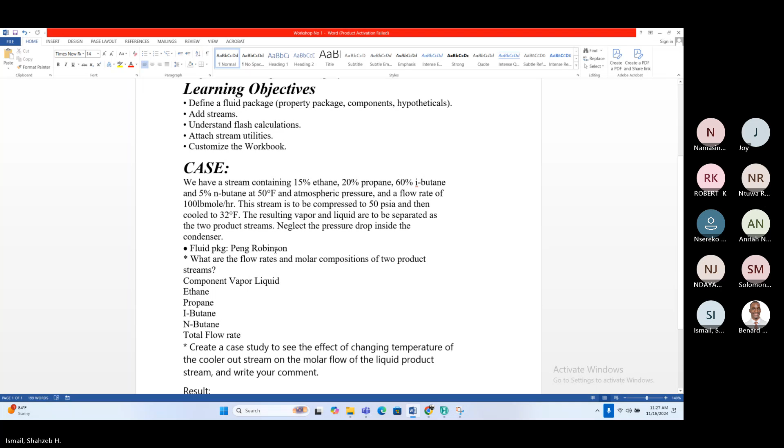We have one stream containing 15% of ethane. Ethane is a hydrocarbon. Second chain, 20% of propane, 60% of isobutane, and at a specified temperature and pressure. So the flow rate we set for the stream is 100 pound mole per hour, and this stream is required to be compressed. So we will add a compressor.

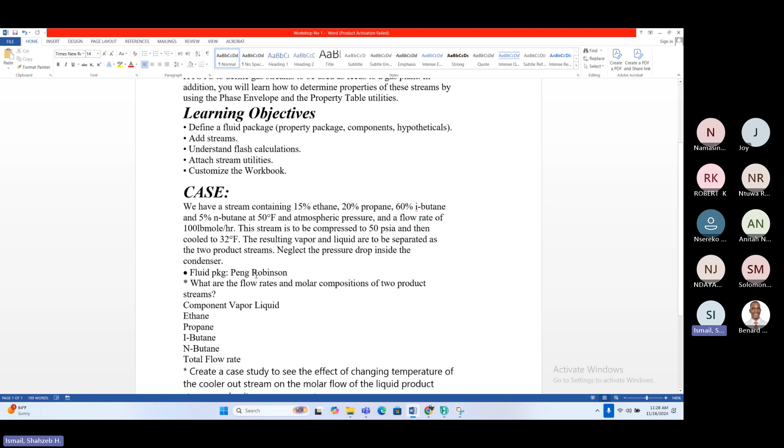First we will add a stream, and then we will add a compressor, and then we will add a cooler to reduce the temperature, because during the compression the temperature of the stream will be increased. The resulting vapor and liquid we will separate through a separator, and from the top of the separator we will get the vapor, and from the bottom we will have a liquid. And these are the conditions which we need to comply with in the software. So we will go through this with the help of the software.

So I put the worksheet and the software on one screen. So it is now visible to all of you, both, or should I change it to a single window? To me, it is visible. Maybe some other members here can propose. Are you guys okay with one? Okay.

Okay, this is the initial window of the software. When you open this icon called Aspen HYSYS, this kind of window will open. So here you can see in the resources, they have embedded some features like what's new, examples, training module. But some of these modules in the offline mode are inactive. They will only be working when you connect with the AspenTech team. Otherwise, you can work on it.

Like for examples, you click it and you have different examples, which were developed by the AspenTech team itself for reference purposes. So you can open it, and if you have a similar kind of a problem, you can click on it, and you can put your own data into the simulation and get the results. And what's new? Any feature you want to explore, you can.

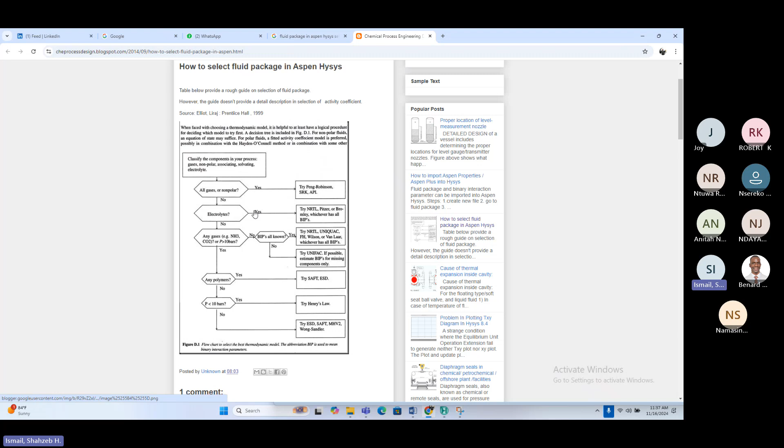But I have downloaded one guideline for the selection of the packages. So here, this is the tree of selecting the fluid packages. If you see here, all gases are non-polar. You can try Peng-Robinson, SRK, API. It will work. Maybe some of the results from different packages are different, but more or less the estimated ones are the same. If you have electrolytes, then you can try NRTL, Pitzer, Bromley,

and binary interaction parameters. If you have gases with a pressure greater than 10 bar, or ammonia, CO2, you can use this. So for starting to learn the software, you need to have this pocket dictionary with you to understand what your components are and what fluid package will comply with your simulation to get the correct results. So considering the pressure less than 10 bar, you can select Henry's Law. All these fluid packages are available in the software. You just need to click on it, and it will be selected and show you the status okay.

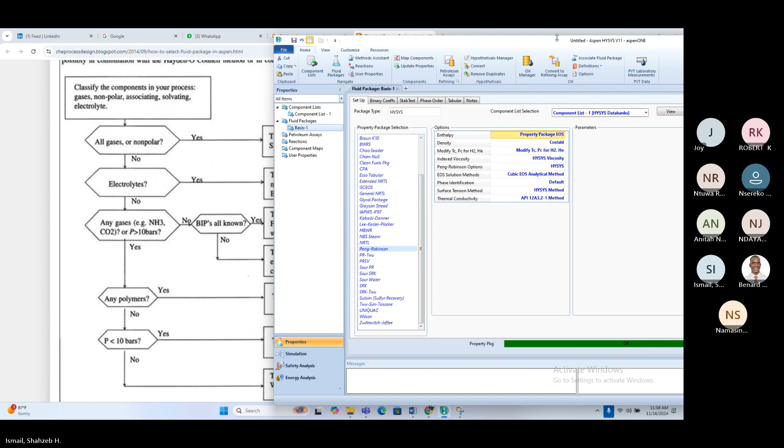So these are the two major steps in the beginning of the simulation. These steps are the important ones, because if you don't select the correct components and fluid packages, then all the simulations you do later on will not give you the correct results you are expecting. So these initial steps are the key to a successful process simulation model. The first one is the component list. You will add the components which are engaged in your process, either hydrocarbon or non-hydrocarbon.

So now here we are in the properties phase. You see the simulation. So in order to go to the simulation phase, you need to click here, simulation, because this is Aspen HYSYS. If you see other software like UniSim Design and Aspen Plus, they have a different mode of operation to go into the simulation environment. So if I click on simulation, then the model palette for adding the equipment and streams is open, and my flow sheet. This is a blank white flow sheet for me to start the simulation.

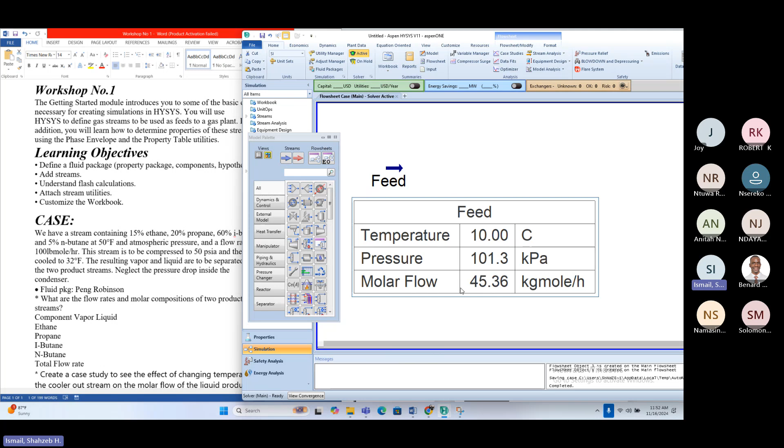The next step is to add the compressor to increase the pressure up to 50 psi. We have here different equipment. If you put the cursor on one, it will show you the name: compressor, tank, three-phase separator, expander, distillation column, pump, heat exchanger, cooler. Dynamic controls like ratio controller, split range controller, heat transfer, manipulators, piping hydraulics. This is all in one palette, and for specific ones like separators you have these. This is the model palette.

We have one compressor, so we will click compressor and put it here. It shows us the compressor.

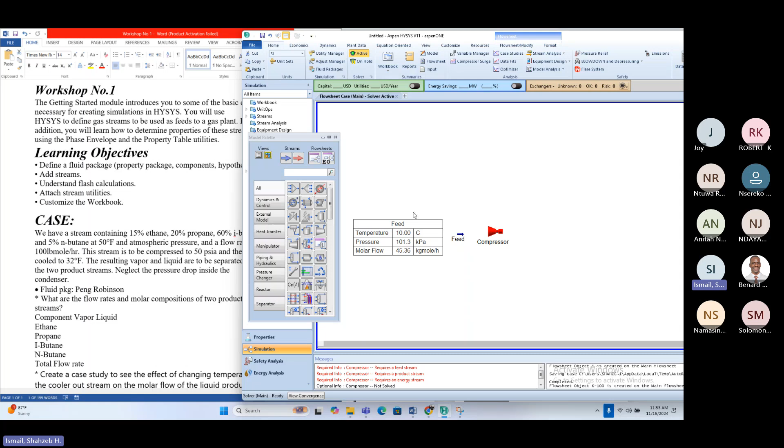There is a workbook for this. When you click this workbook, it will show like this. Composition, we have added already. Energy, no. Compressor equipment, unit operation, compressor we have no. Now we have two options.

Either we will click control and this will show like this. We will drag it and connect it with the compressor. So this is not the right point. We will add this and click this. Now disconnected. The previous point was for the screw compressors. If we have screw, means liquid, then we will connect here.

And for the product, we can click here, this point, and it will add a new stream for the product. We will add compressor discharge. There is another option. When you click this equipment, it will show you this palette. Here you will write, for example, I add the feed here. So if I disconnect here, break connection.

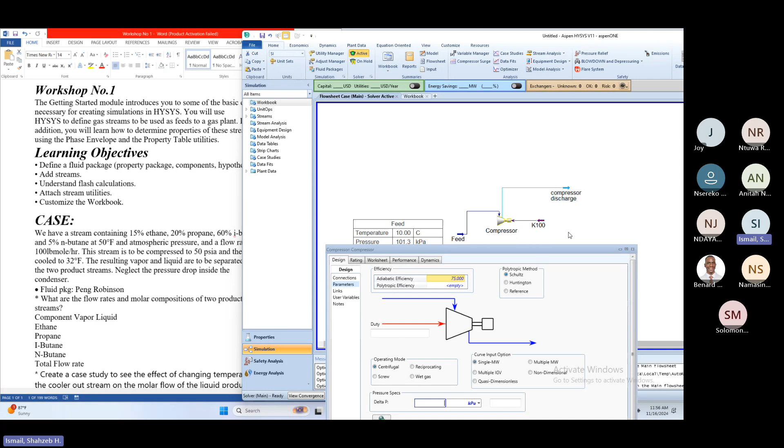Or I will click the stream here, and I will put only the discharge pressure, and temperature will be automatically calculated. So we have the discharge pressure 2 psi. I will click 50 psi. Okay, so it converges. Temperature automatically calculated, all parameters automatically calculated.

Compressor duty calculated based on discharge pressure, and pressure ratio also calculated. So I have not input the delta P spec, but it is automatically calculated as 243.4 kilopascal. Just putting the discharge pressure, the unit is converged. The second option is that I don't put the discharge pressure, and I put here the delta P, 243.

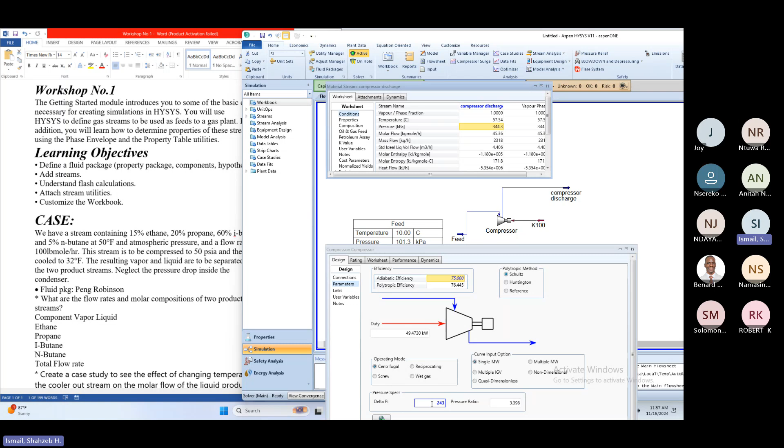Again, it is converged. But now there is no option to change the input. Every time I have to change the compressor pressure, I need to change this delta P. Then I will get the discharge pressure. So normally we put the discharge pressure directly into the stream to get the duty from the compressor, because during the case studies it will be easy for us to use the stream pressure rather than using the delta.

But in actual practice, for the compressor curves, they consider the differential pressure. So during the initial phase of simulation or the learning phase, you can select the discharge pressure as I suggest. But when you become a master of the simulation, you will know where and how the parameters need to be put.

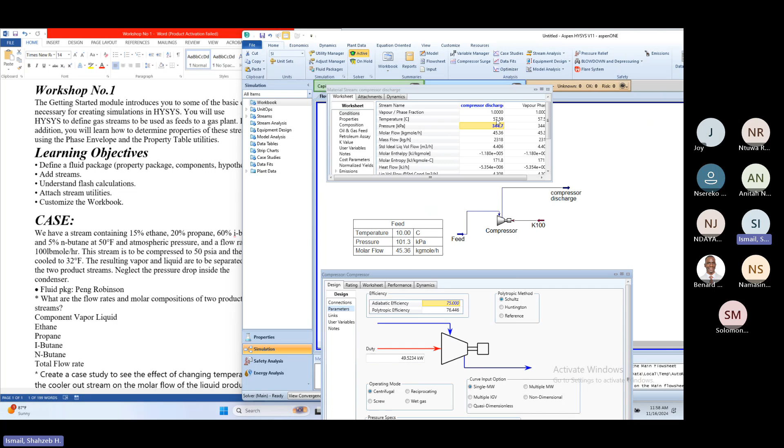So now one equipment is converged and this equipment is showing okay, and we have the discharge temperature of 57.59. When I click show table, it will show me pressure, product pressure, molar flow like this.

So the compressor model is developed. Now with this model, I can see the discharge temperature, the change in properties, for example, density, vapor phase, how much, and liquid phase, how much. And now if I see the workbook, material streams, it has now added two streams. So overall, if I want to see all the material streams, then I can work on this workbook.

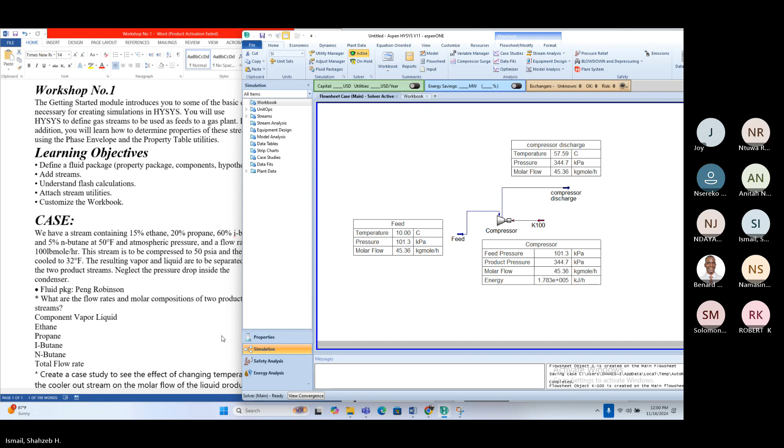This blue color is showing the inputs. I can change it as I want. For example, if I change it to 12, it changes and gives me the result in the simulation. And if I change to 50, you can see the temperature is increasing to 98.5. Now, the next part of the simulation is to add the cooler.

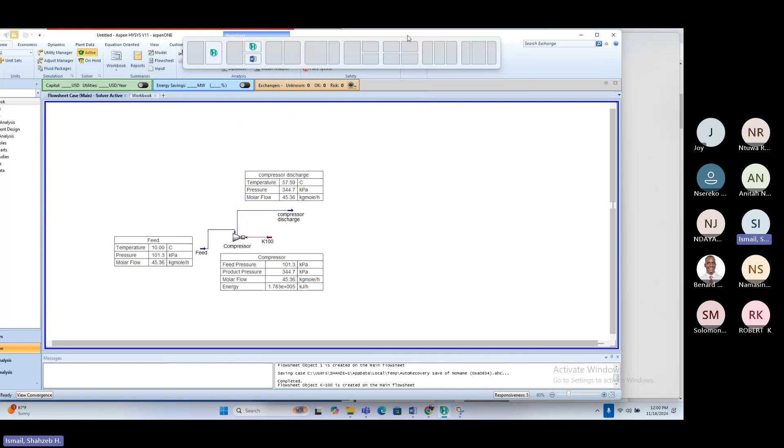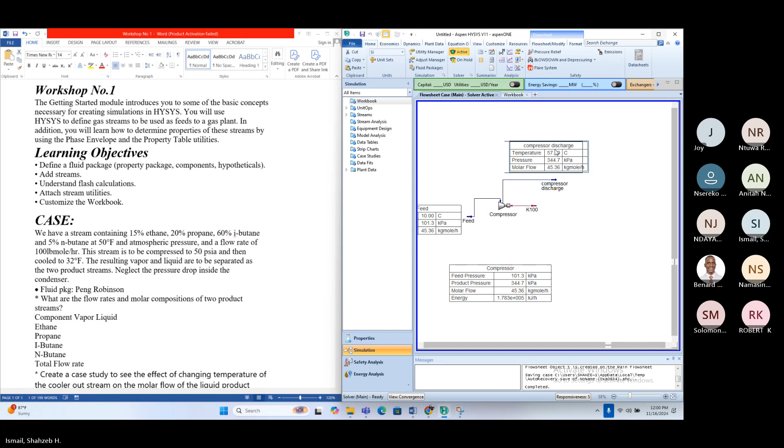And I click this flowsheet modify, it will show me again the model palette. And when I click this cooler, I will add the cooler and connect the streams. Now I put cooler outlet. This is the energy stream.

So the lower temperature I put here, automatically it will calculate how much energy this equipment requires to be removed to achieve this temperature. If I have the energy stream available, then I will put the value here, the energy to be removed, and it will give me the discharge temperature. So here we need to reduce the temperature to 32 degrees Fahrenheit. So here I will put 32 degrees Fahrenheit, 0 degrees centigrade.

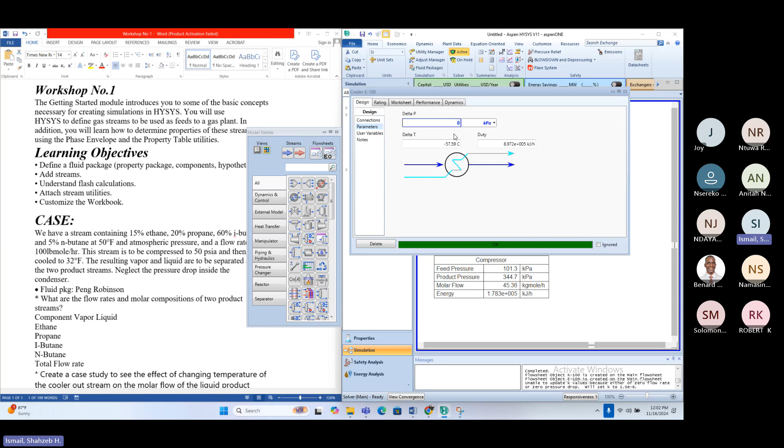When I click it here, it is showing me the parameter which I need to add, which is unknown delta P. So I will put that there is no pressure drop in the cooler. I will put 0, because this delta P data is not given. Now it is converged. Now we have added the cooler E100.

The last part of the simulation is to add a separator that will separate the liquid and vapor. And here I have a three-phase separator and a two-phase separator. Three-phase separator means we have hydrocarbon liquid, hydrocarbon gas, and water. Here we have only hydrocarbon liquid and vapor because we cool down the stream of hydrocarbon.

So here it is showing vapor fraction 0.233, 80% liquid and 20% vapor, because we reduce the temperature to condense the hydrocarbon into liquid phase. So this fraction of 0.23 overall stream means in the vapor phase is 20% and in liquid phase it is around 80% approximately.

Now we need to separate this into liquid and vapor because now we have developed a two-phase liquid vapor stream. We add a stream of hydrocarbon, we compressed it, increasing the pressure increases the temperature. We reduce the temperature to condense the hydrocarbon into liquid and vapor phase. Now we want to separate it into liquid and vapor phase through a separator. So the separator works on thermodynamics.

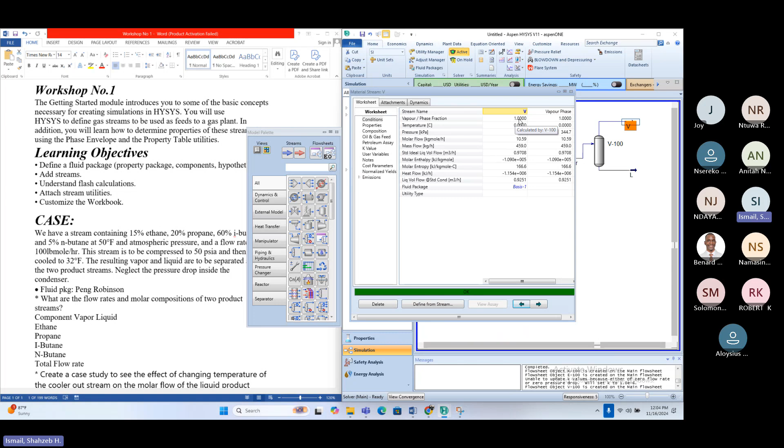We will click here, put the separator here. We connect. This is top, the vapor stream, bottom, liquid stream. We will put V for vapor and L for liquid. Now if we see, there is only vapor, one means showing 100% vapor. And flow is 459 kg per hour.

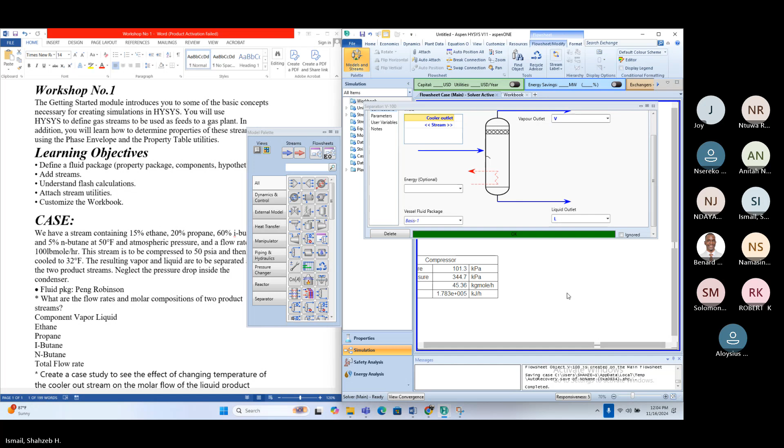So if I click this vessel and go to the worksheet, it will show me the overall profile of the column. Liquid is 0. 0 means 100% liquid. 1 is vapor, which means 100% vapor. So in terms of kg per hour, my feed cooler outlet is 2300, in which liquid is around 80%, which is 1860, and vapor is 455. We separate liquid and vapor with the separator.

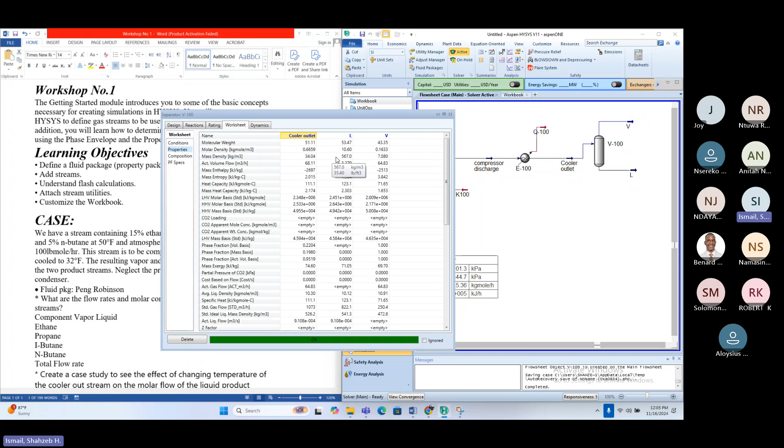And we can also see the properties of liquid and vapor like this, because vapor molecular weight is less, liquid high, density changes, density for liquids is high and for gases it is low. So all these properties you can find from here. And if I click here, then it will show me the overall profile.

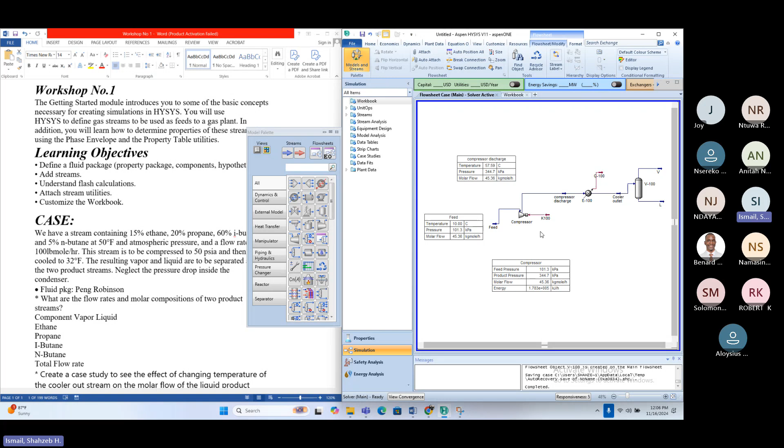So in this simulation, what we need to check, we need to see that at this temperature, how much is the vapor and how much is the liquid we generate. Hydrocarbon from ethane to isobutane and normal butane.

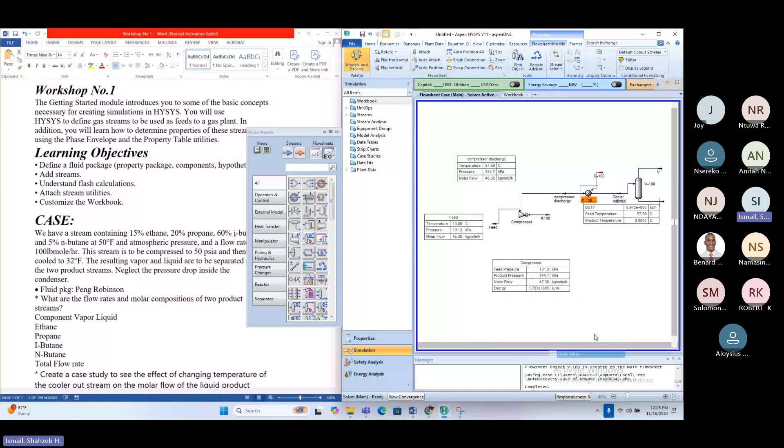So far, if you have any questions, please ask. If you have questions, you can ask as we progress.

So this is the model we have developed, because our objective was to see the liquid vapor ratio in the hydrocarbon, how much liquid will generate if we reduce the temperature of the discharge stream to 0 degrees Celsius, 32 degrees Fahrenheit. So if I click show table here, now if I click here, see, this is the temperature of the cooler outlet, this stream. Okay, I can change the icon also.

Okay, now I will put 4. Now change in flows. See, if I put 4, more vapor now. See here, more vapor, less liquid. At 15 degrees centigrade, all vapor. 11, some vapor, 14, still vapor, 14.5, still liquid available, 14.8,

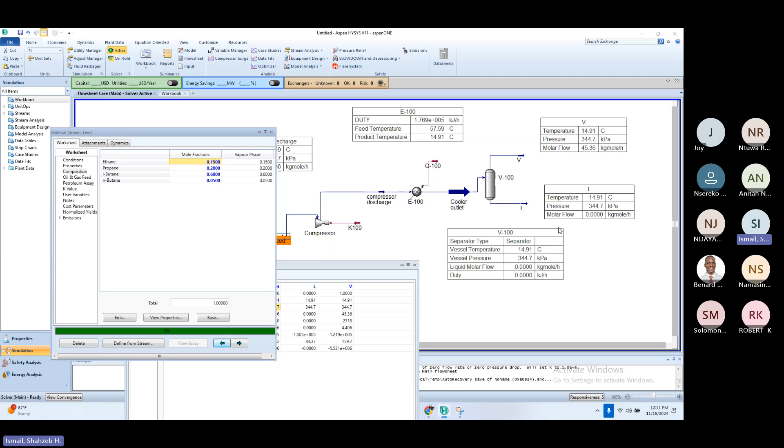Because this is a small single flow sheet, but if you see the large models which contain multiple plants, then you need to identify where your inputs are. So if we see a few examples from resources, start that because I've already opened one flow sheet. But with the software you can open it. If I close this, then I can open that file.

Shahzeb, I have something to say.

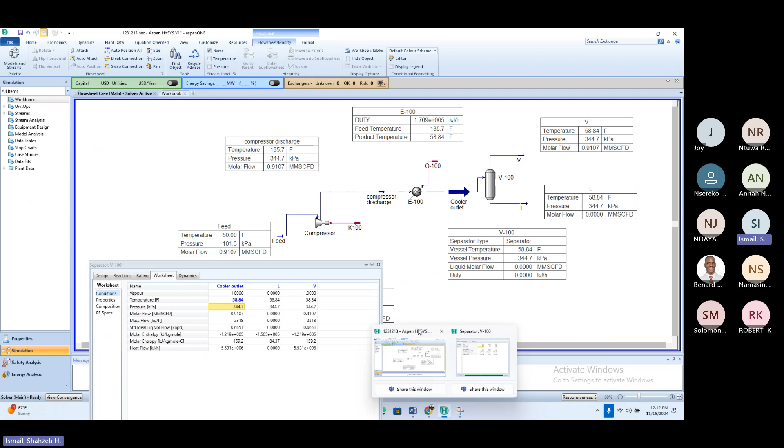Yes, now, you guys, the most important thing here is to interpret the data. As Shahzeb has indicated to you, whatever you're seeing here, these are operating parameters or conditions. And that's why in our previous sessions, we told you that the heat and mass balance is linked to the process flow diagrams. So what you'll always find on the process flow diagrams are these parameters here, the ones in the table.

So Shahzeb has done the simulation, has developed the model. So if you generate this in Excel, you will get the heat and mass balances, which you can use now to compute or to calculate the size of this separator, the requirements of this heat exchanger for design.

So now what you can observe here, at this temperature of 58.84, we do not have any liquid flow rate. So that's the dew point. All that is coming into the separator is actually vapor. It is vapor, no liquid flowing out. 0, 0, you can see it here. So you should know how to interpret this. What does that mean?

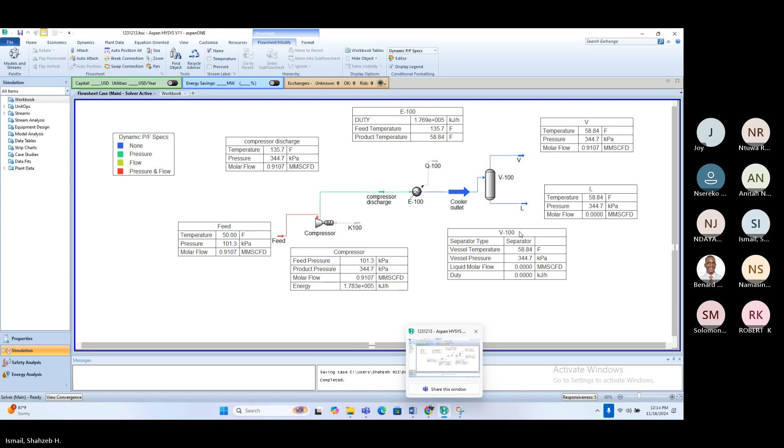I put here 32. Then we have liquid in the bottom stream. What we can do, we can put a pump here, and it will move the liquid at a certain discharge pressure, for example 100 kPa. 100 kPa showing negative temperature means the pressure is very low, and this is the error, the yellowish colored error. So I will put 500.

Now this is converged. I changed the dynamic color scheme, but default is okay. Now I have the liquid stream at this pressure, and I will employ what we can say the tank, and we will put the tank. We remove, hide the streams, the upper stream like this. So we are now pumping the liquid to the tank.

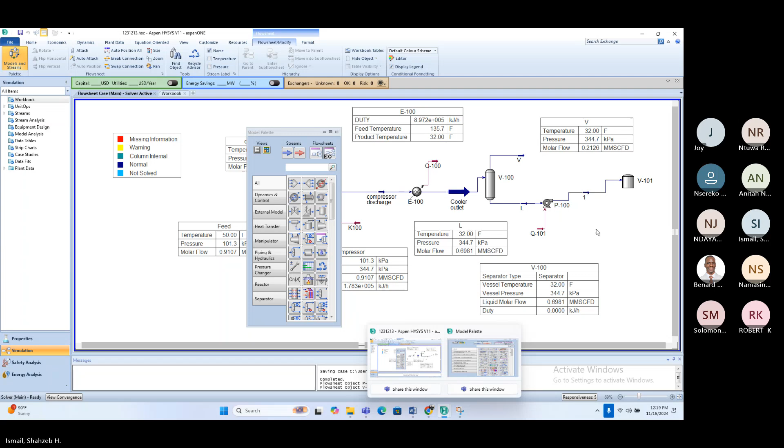Yes, Shazeb. I just have an addition. So you guys, you can see up there is economics. So if you have the pricing data with you for each stream, you can get the capital for this. Now, if you're estimating the cost, how much you actually need, because here now the major equipment we have, you can see there's a compressor, there's this heat exchanger, there's this separator, pump, and then the storage tank. So if you want to estimate the cost, you can get the price data and you'll be able to estimate the capital here, even the utilities.

Yeah, you can see up there. If you have the cost data, even the energy, and then the feasibility, all the risks. You can also even estimate the emissions that your plant will be emitting. If you are working with an operating plant, you can link to the plant data. You can see up there, plant data. And that is if you want to do it in situ.

So maybe what I wanted you to show us is how to get the Excel sheet from this. The sheet, yes. There are options available. For example, if you click on the Excel, one option is that you click all data here, select all, copy, Control C, Control V, all data pasted in Excel with the streams.

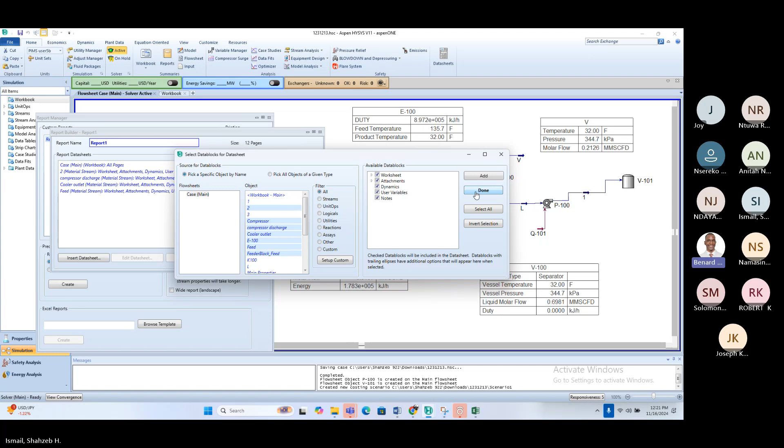And other option could be from the reports. So you create one report, insert data, click all, add. Is it possible to import all, including the other physical properties that we saw at first, into Excel? They can use that data to size the pump and the lines directly in Excel.

The report is generated like this from Aspen, but for Excel, there is another way to do this, but that is from the Excel. There is Aspen Simulation Workbook. But this is another software. We can do all the things here, but using Excel by enabling it. But let me see another way. Because in the report, it converts into Word file and PDF file.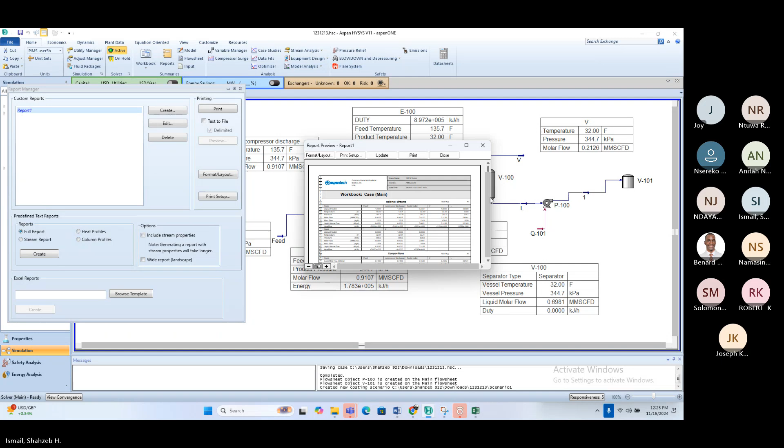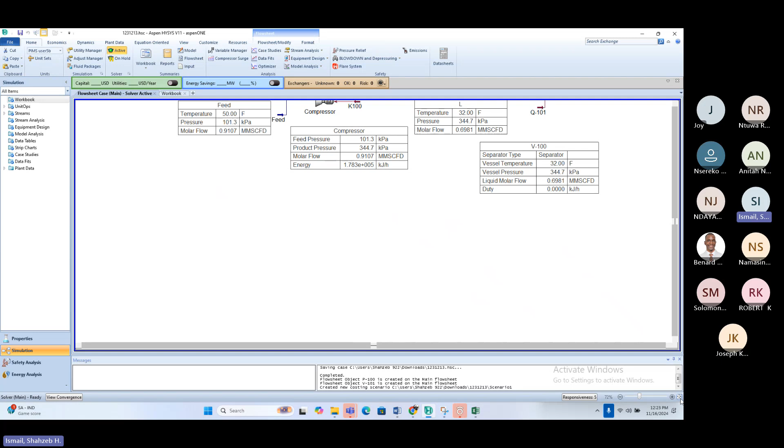For the Excel, we usually only copy paste like this, as I did already. For example, if you want to have the data for the pump, and you go here, Control C, so you will find like this. And for properties, you can also Control C, Control V, so all properties will be added like this. Now you can work.

It is easy rather than exporting the data to Excel. Yes. We can copy even the flow sheet and paste in Excel, I think. Yes, this is easy. Because if I connect two softwares together, like Aspen Excel workbook and Aspen HYSYS, it will take more tokens on Aspen HYSYS, and also I have to build another sheet in Aspen Excel rather than with the simulation. This will be an additional work.

If I know that I have to monitor too many parameters in the Excel, then I will start using Aspen HYSYS via Aspen Excel workbook. So I will start inputting the data in the Excel directly rather than doing the simulation itself. Yeah.

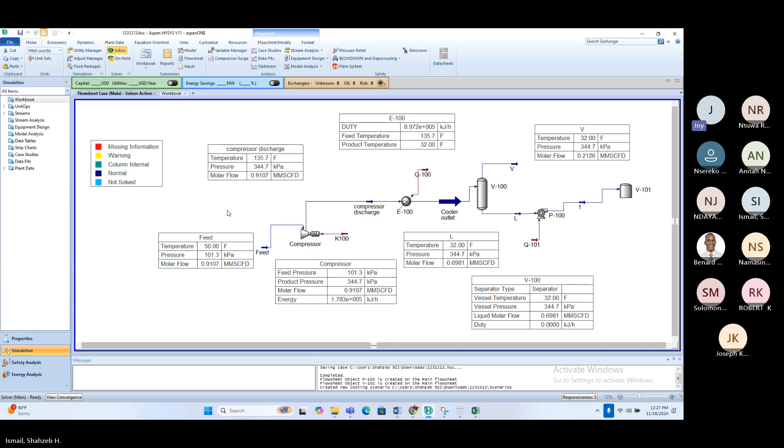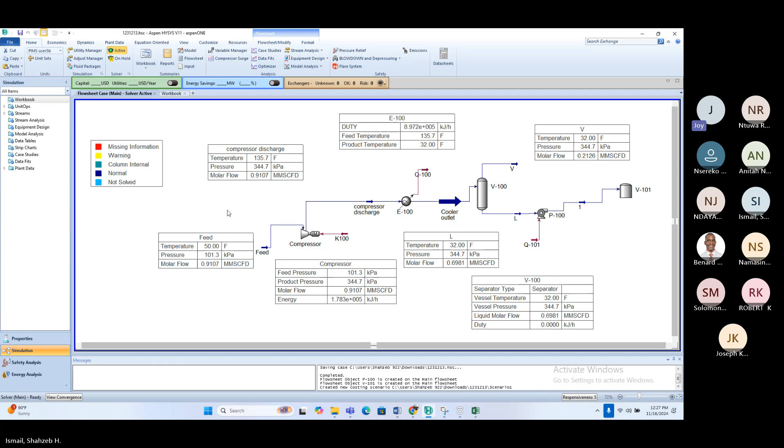Yes, Mr. Joy. I wanted to ask, for the simulations, how do you know the packages? That is one, maybe that I'm supposed to pick Peng-Robinson, or are these things automatically in the manual? Then even the equipment, let me say there are many distillation columns. How do I know that, or maybe someone already designed it for me? It's just about me creating the simulation.

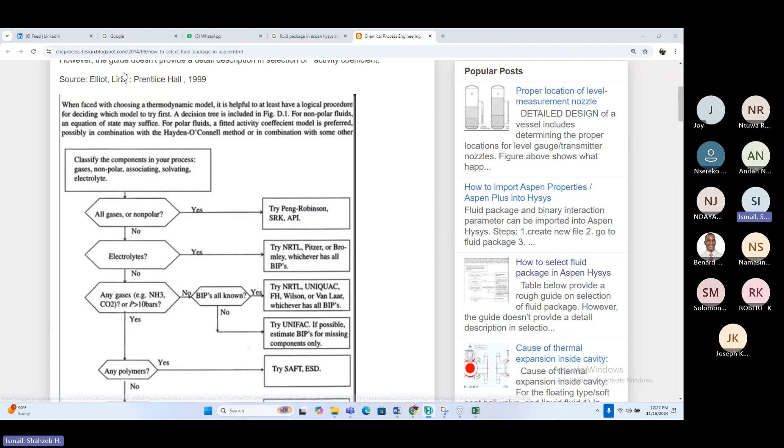Yes. Regarding your first question, how we will select the fluid package, in the Aspen help and also on the internet you will find this table. This is a decision tree called thermodynamic model. So it depends: you need to justify whether your components which you are going to use in the simulation are polar or non-polar. Is it all gases or is it liquid hydrocarbon? For example, is it water or hydrocarbon gases like methane, ethane, butane, propane.

Then if it is all gases and it is hydrocarbon, the first hexagon you can see is showing yes, then we will select Peng-Robinson, SRK, API. If these are electrolytes, like Ca2+, Na+, NaOH, compounds which have positive or negative signs on them, then you can go with these fluid packages. If any gases have a pressure of more than 10 bars and are acid gases like ammonia, CO2, SO2, SO3, then you go to these thermodynamic packages.

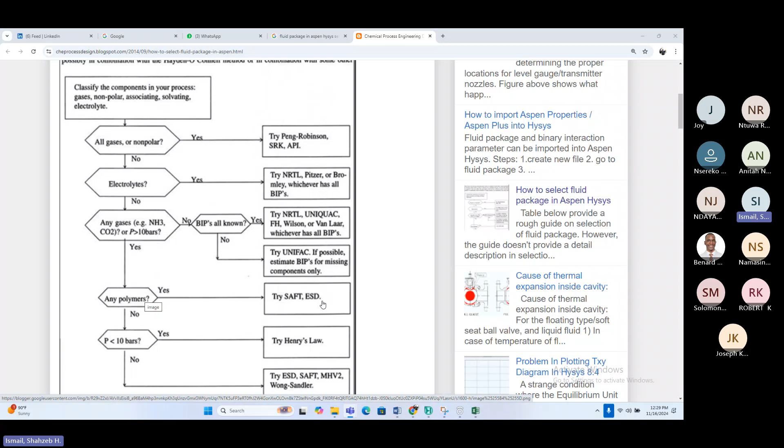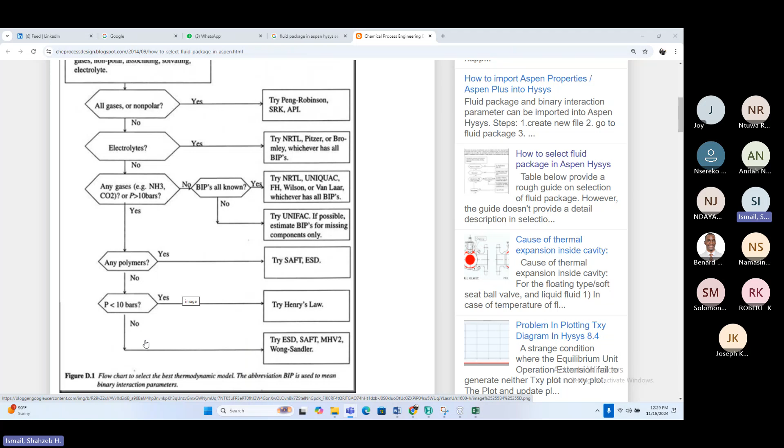If polymers are involved, like polyvinyl chloride, PPA, PDA, polypropylene, then you will go with these fluid packages, SAFT and ESD. If any stream has a pressure of less than 10 bars, even if it is water, then you can select Henry's law. If no, then you can select this if it is more than 10 bars.

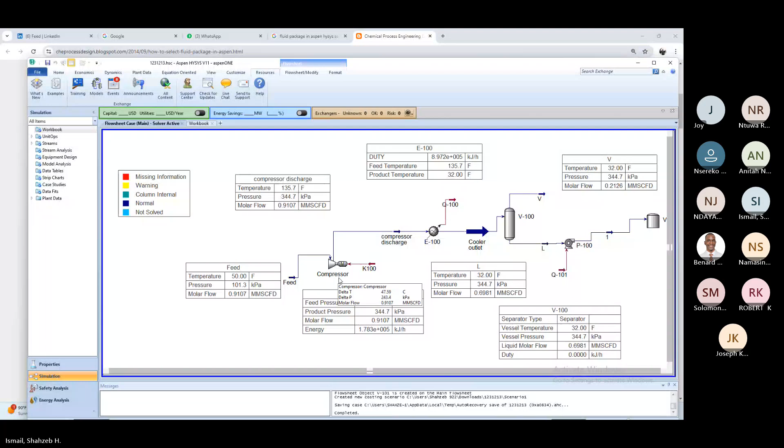Yes, Shazib, just a quick one. So, guys, what Shazib is telling us is there are two ways. You can use the help icon in Aspen. So depending on the industry you're in, if you're working on oil and gas processing, you click there and you'll find the packages they recommend for you to use. If you're in refining, chemical, clean fuels, and so forth. So Aspen gives you guidance on which package to select depending on the industry. Or you can use the flow chart he showed us.

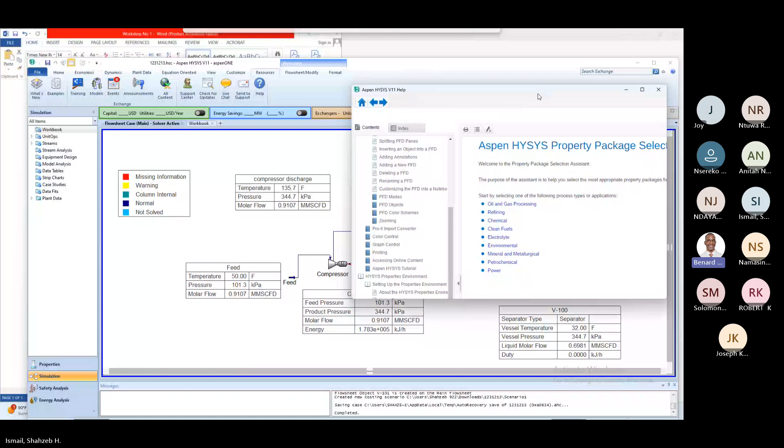Then the other thing that Joy was asking, how do you know, or is there someone who has already created it? There are templates. Or you can start from scratch like he did here. He showed us some templates when he was starting. Aspen has some templates for different units. You can choose the template and modify it, or you can start from scratch.

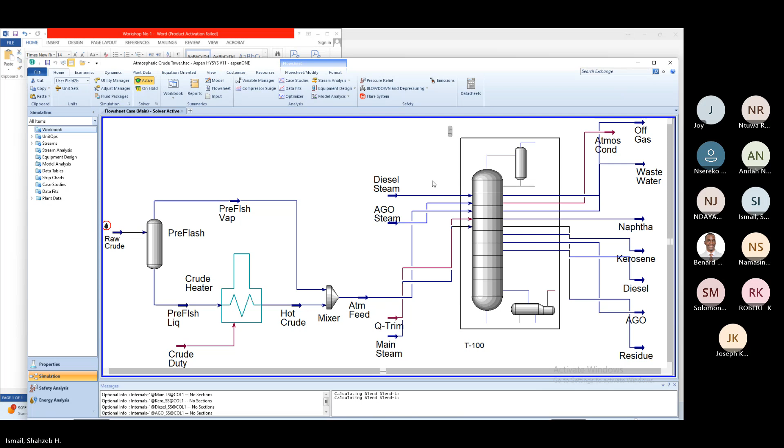For example, this model is an example developed by Aspen. This is an already converged model. I go to the resources and I put examples. Then here I select atmospheric crude tower. Then it gave me this distillation model.

And when initiating the simulation, we should have a clear objective of what we want to do with the simulation. Without a clear objective, we could not complete the simulation. For example, if you want to see the naphtha 90%, this is our objective. Then to achieve the naphtha 90% distillation cut, we need what equipment, what feed quality, what thermodynamic package. These are whats. How many whats? The more questions you ask yourself, the more clarity you will get.

And if you get stuck on any question, then you need to ask your supervisor or your mentor how to deal with it. So this is for doing the simulation. This is me versus me and you versus you.

So you want to do the simulation first. I recommend to have a detailed course on it if you don't have much information about it, because this is just a demo showing the power of simulation, how simulation can do different kinds of tasks. So this was just one example, but there are many detailed courses available both in steady state and dynamic state. The one which we did is the steady state, but there is also dynamic state.

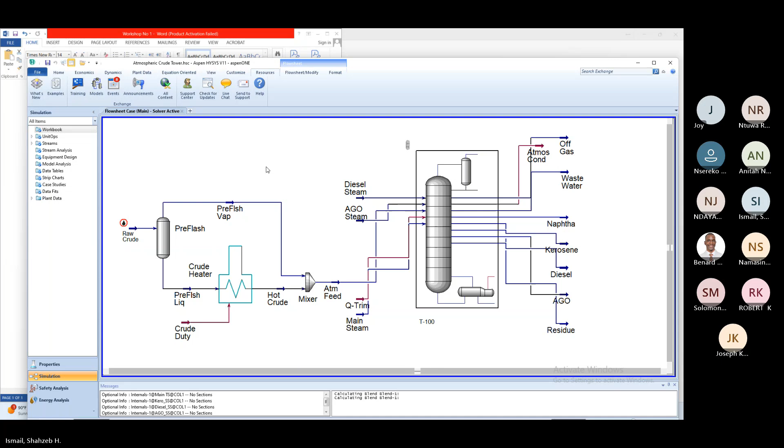Thank you, Hassan. Any other comment? Any other question before we close this? As we wait for their comments, I'm going to request you, Hassan, that model we have. Can you repeat? Your voice was interrupted and not clear. For the... Yes, Benard, I was disconnected. I've joined again.